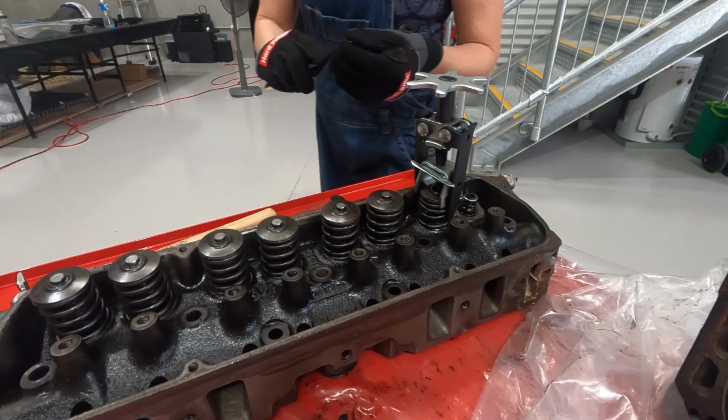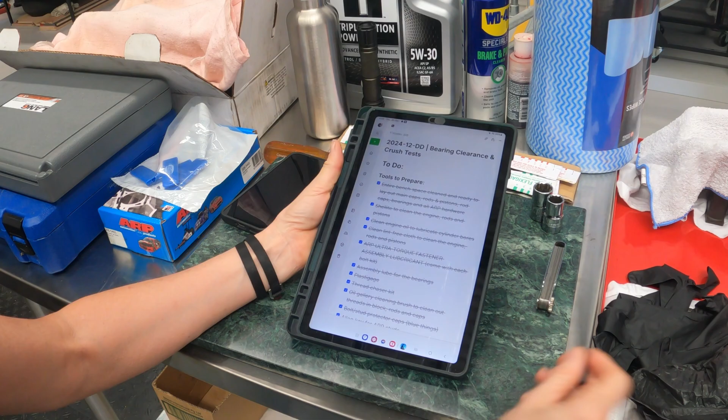So I've made a nerdy checklist, which is going to guide me through doing this because I haven't done it before. I've researched a few different books to get a sense of how it should work. So I'm pretty confident that I've got the procedure right, but because I've never done it before, I want to be quite methodical in how I go about it. So I have already gone through a list of all the tools and bits and pieces that I need, and that's all laid out here.

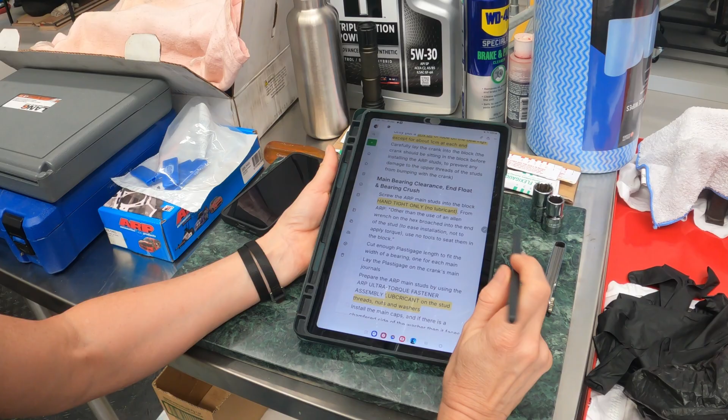Going to start with cleaning and getting the main bearings ready. I've got a few notes here highlighted which are important things for me to pay attention to. So once that's all cleaned, I'll get started with main bearing clearance, end float and bearing crush tests. I'm using Plastigage to do the oil clearance checks. Haven't decided yet if I'm going to do it on all of the main bearings or maybe just 2 or 3 of them. We'll see.

I'm also using ARP studs for the mains. So they have come with a particular lubricant which I'll need to use on the threads and the nuts and the washers for those. So that's why that's highlighted. And they have their own torque spec as well, so I'll be making sure to follow that. It's not too far off what the 308 factory torques should be, but I think they generally need to be a little bit higher with the ARP studs, so that's why they are 80 foot-pounds instead of the 60 to 70 foot-pounds that the Holden manual says.

Now, bearing crush is not something I could find much information about. Gary, who I've mentioned before as my Holden mentor, recommended that actually, and I think he found me a little bit of an instruction for how to figure out what the bearing crush should be. I don't know that it's all that essential, and what I have read is that if you get your oil clearances coming out pretty well to spec, you don't really need to worry about bearing crush, but because I'm here learning, I'm going to give it a whirl.

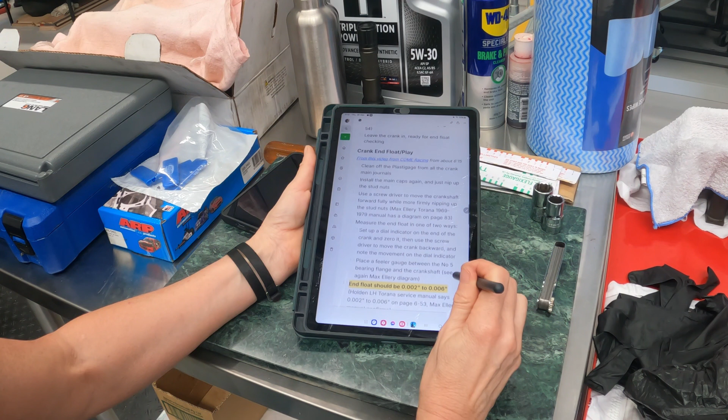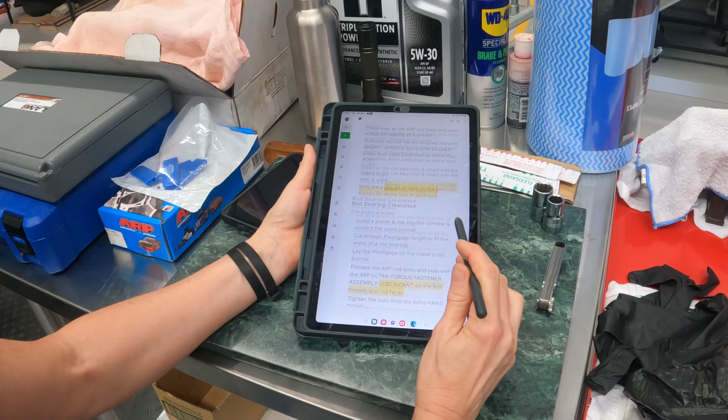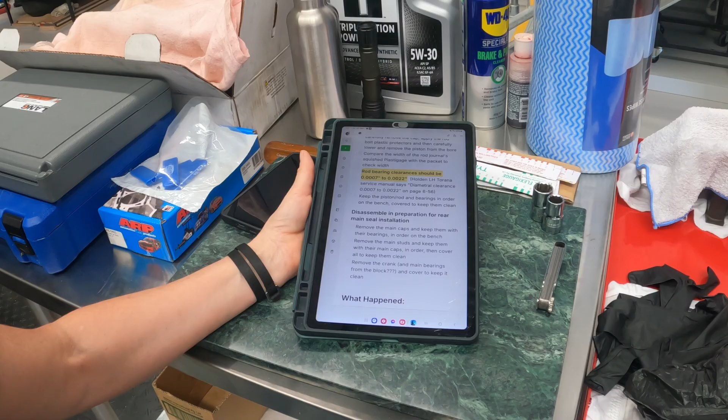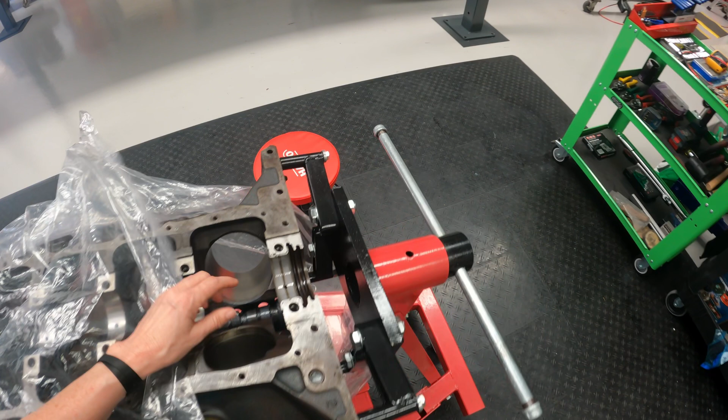And then if I reach that, I will pretty much be ready to turn my attention to possibly the scariest part of this build. Now, the scariest part of this build is the rear main seal, which I have chosen to use a rope rear main seal. Could be a mistake, I'm not sure, and I'm not sure if I needed to get any machining done in order to use a neoprene or some other kind of rear main seal. We'll see. I just wanted to be authentic, so yeah, that's a question and a problem for another day.

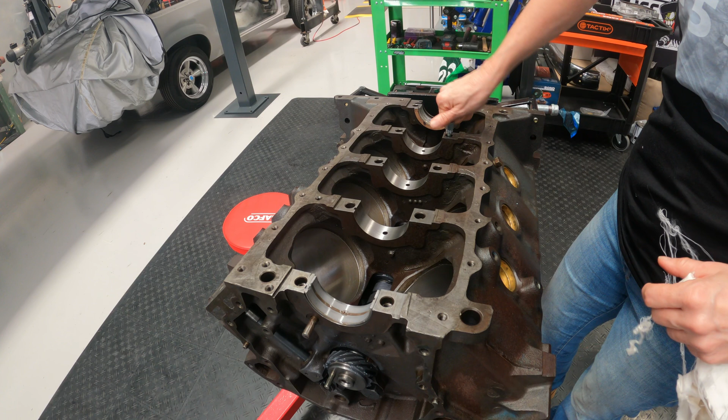The block has been cleaned, including all these threads, but I'm just giving them a quick clean out with a thread chaser because it's been a little while since I did clean the block. Just want to make sure there's no grunge in there. There is lubricant, but there's no crud, but yeah, it doesn't hurt to check them.

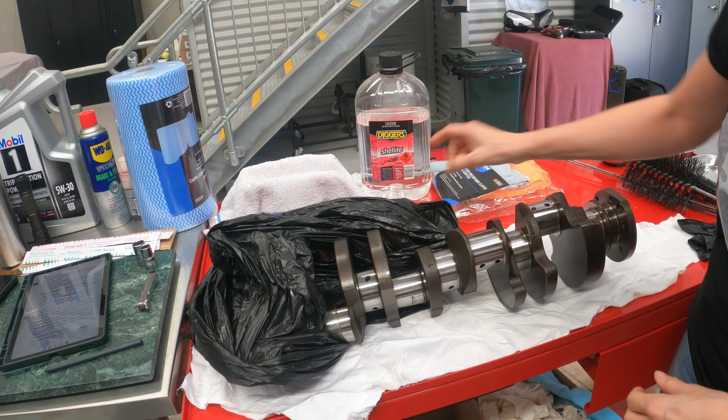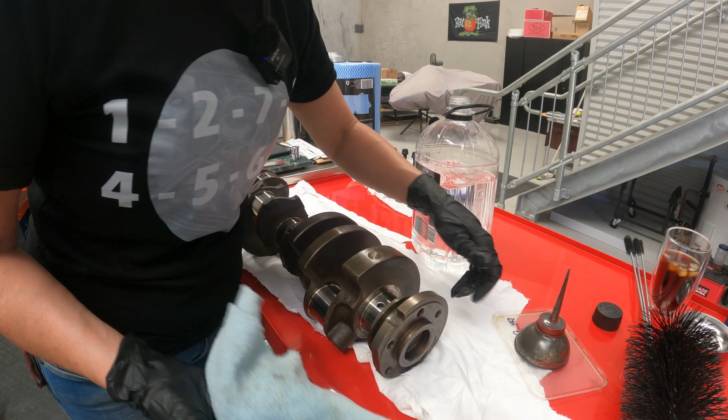So I will get started with cleaning. And I'll start with the crankshaft. This has already been cleaned actually quite thoroughly, even the oil galleries through the journals there. And today I'm really just giving the journals in particular a bit of a once-over, so there's no grunge or excess lubricant on there. We have ACL bearings.

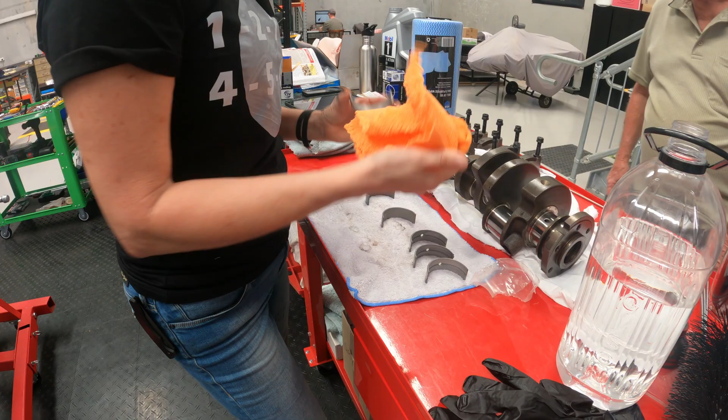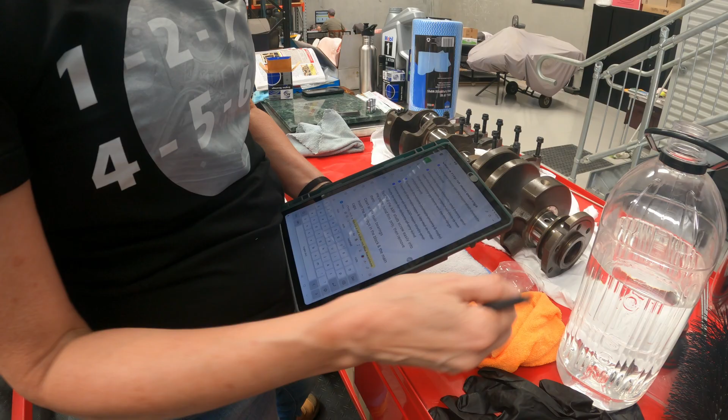So all the crank journals are clean. I have cleaned the main caps. I have checked over all the studs and nuts. They look good. Well, they're new, so they should be fine. I've already checked that they screw into the block okay. I've cleaned all the main bearings. So now I'm just going to put them into the block.

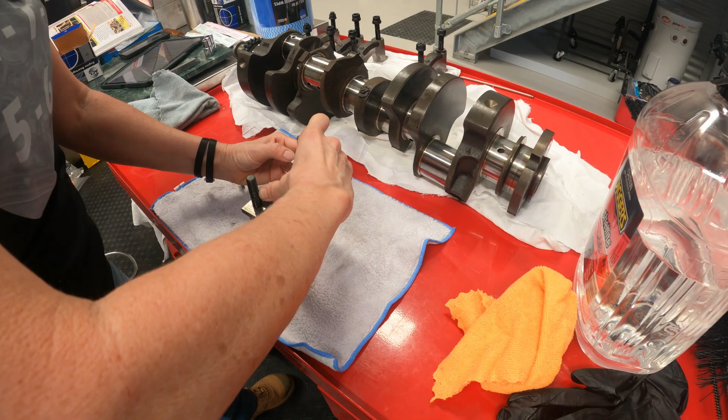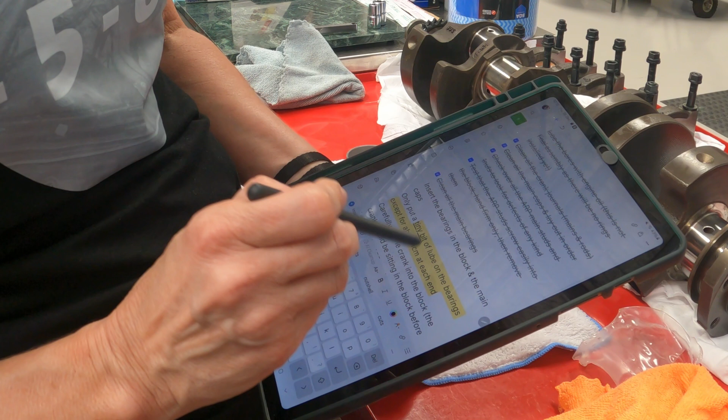For some reason I found an instruction to put a little bit of lube on the bearings, but that doesn't make any sense if I'm going to be putting Plastigage on there. So I think that is actually a wrong step. I'm not going to do that.

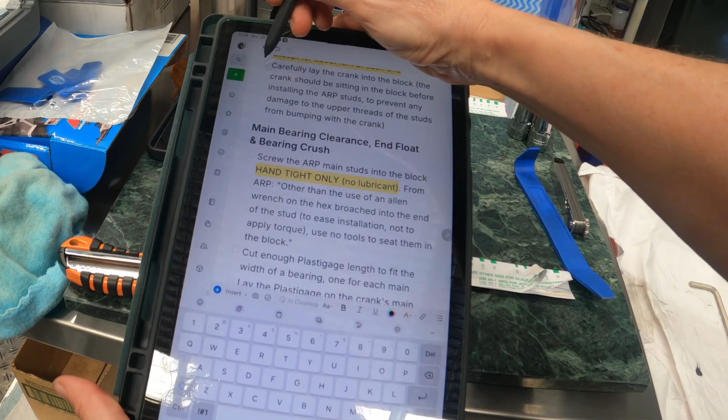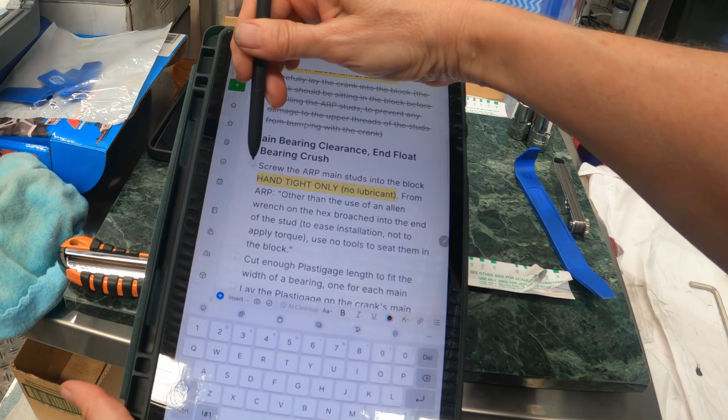And then the crank will go into the block next. So the crank is in the block. It did have to come out again because I dropped the first piece of Plastigage down onto the cam and had to get that out. The ARP main studs, they just get screwed into the block hand tight with no lubricant, so that was done, well, main cap by main cap. And the same with the Plastigage. I ended up putting that onto every main journal.

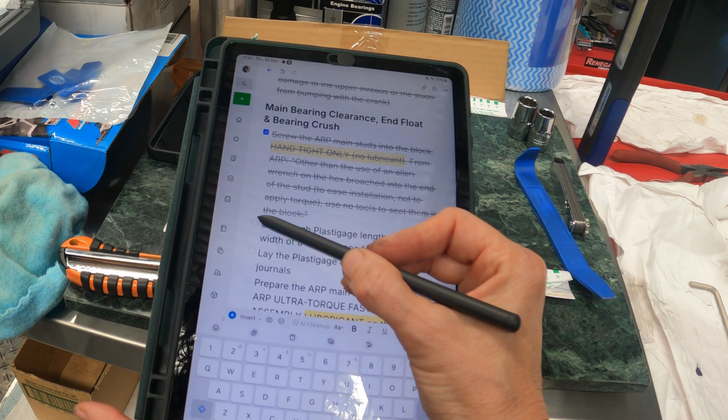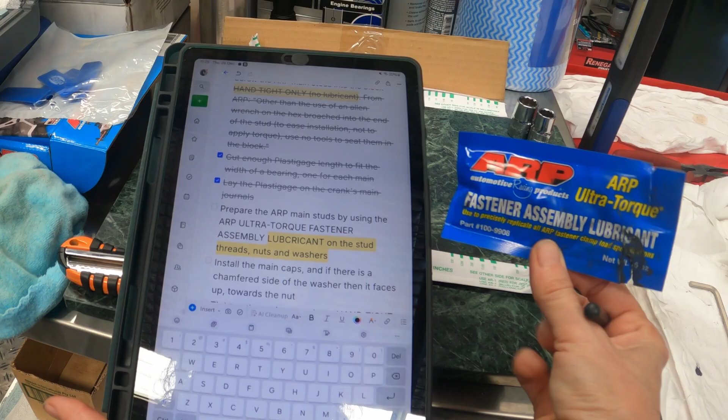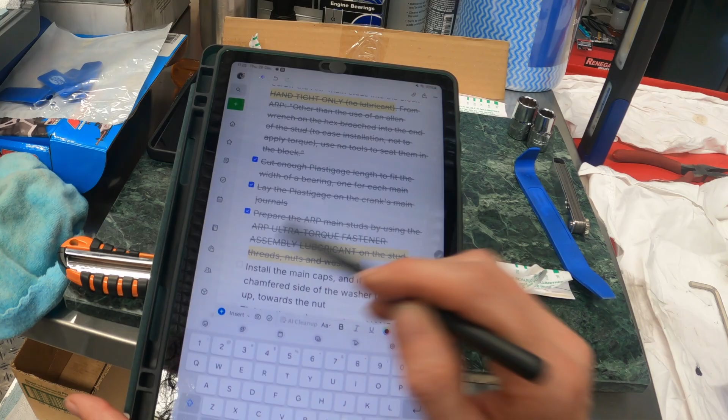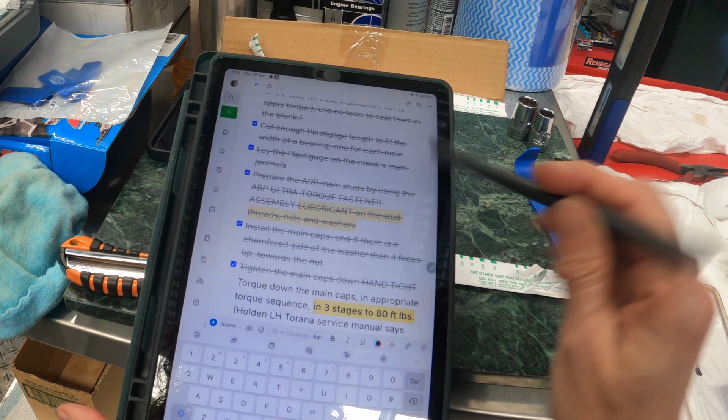And then I did use ARP's lubricant to do the stud thread, the upper threads on the studs, the nuts and the washers. So they are all done, and all the main caps are on, but I have not tightened them. Whoops. They're just hand tight at the moment, so we are now at the stage of torquing them down. This is just getting the main caps down onto the block before I get a torque wrench.

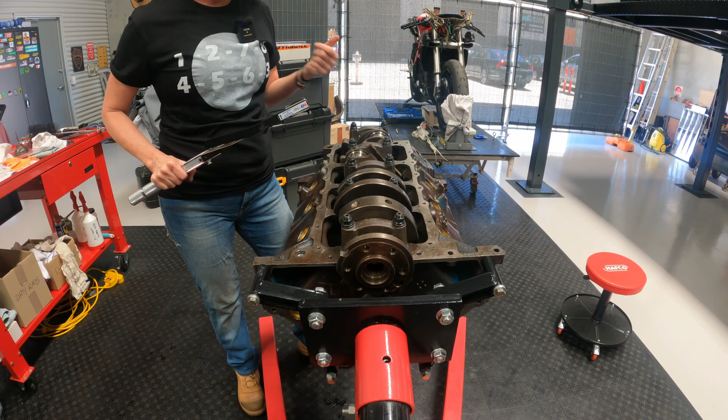So with these ARP studs, the torque is 80 foot-pounds. I've done 30 all the way around and 55 all the way around, and now I'm going to find out if I'm strong enough to do 80. Maybe not. Last one.

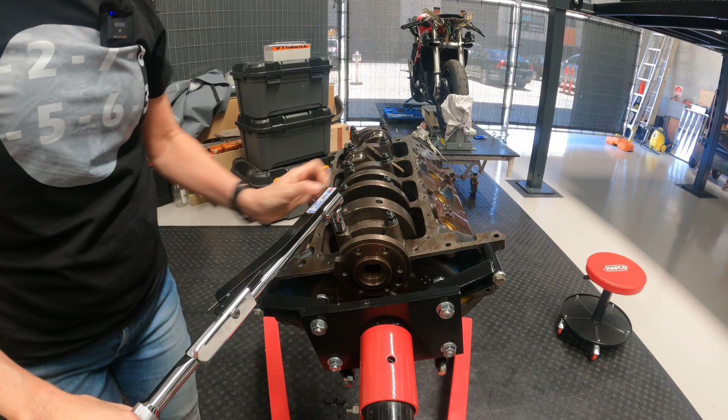Yay. The only interesting thing is that, and it's probably because they're studs and they just get hand tightened into the block, but there's slightly different lengths of stud hanging out. That's probably got 3 threads hanging out. That one's probably got 4 threads hanging out. And I don't know if that's consequential or not. It could just be the way the lubricant kind of grabs or gives as the nuts are getting torqued down. But yeah, 3 or 4 threads hanging out.

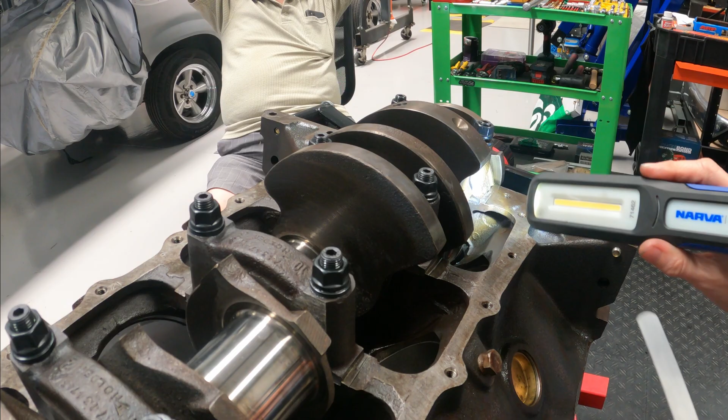So I was in two minds about doing the bearing crush, but decided to do it on one main anyway. So what I've done is left this torqued, completely backed this one off, and then I'm going to put a feeler gauge in between the main cap and the block. And ideally it should be between 3 and 5 thou. And this is a 3, I can't do it with one hand. What's this one? That's a 3.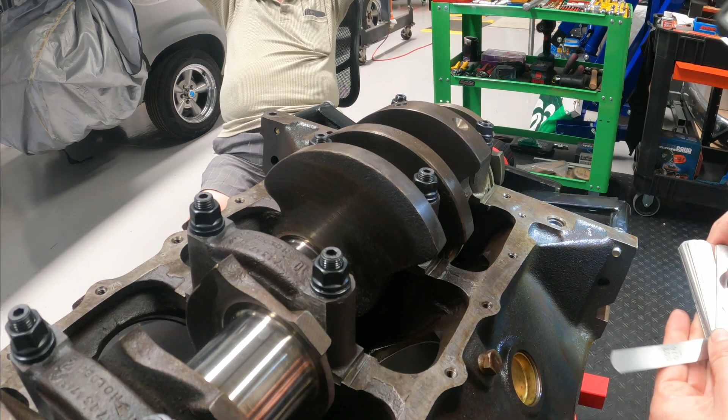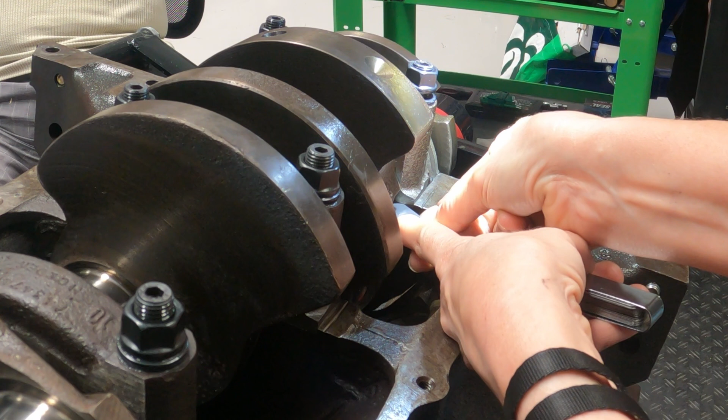Well, I had it in before, but I can't get it in now. Why would that be? There we go. Will it take a 4? No. It won't take a 4. So there we go. I don't know if that's worth doing or not, but that's what I did.

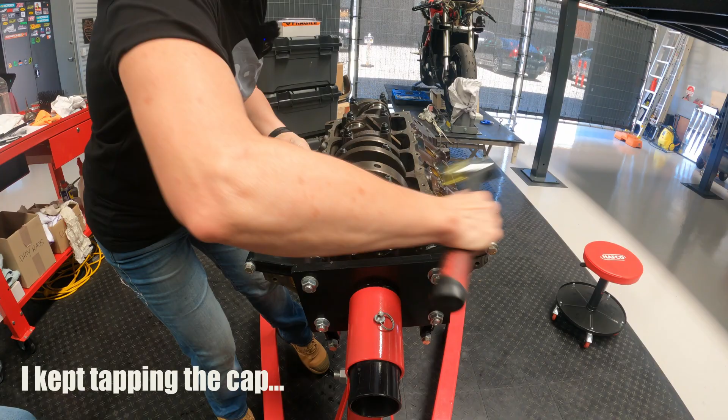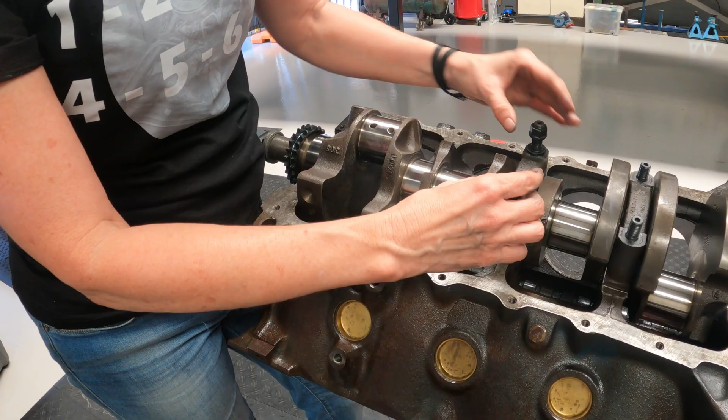So what seems to work is I've got to take the studs out and then tap the main caps loose until my little hands can lift them off with some level of control. There we go.

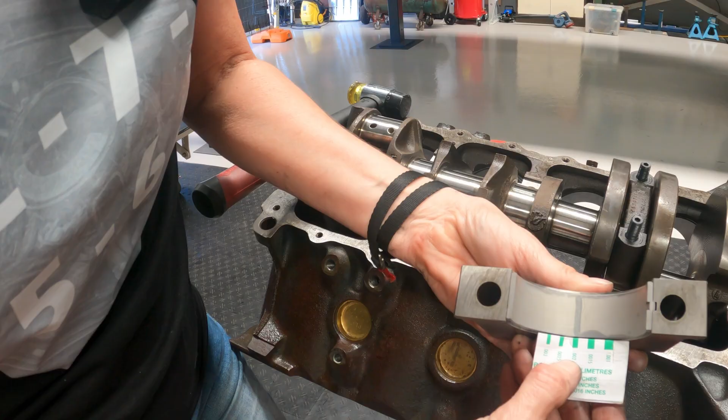And they're all pretty much coming out at pretty close to that 2 thou, maybe a tiny smidgen bigger, but not as much as the 1.5 thou, I think that one is. They're a bit smaller than that, and definitely not as narrow as the 2.5 thou. So anyway, they're all coming out within spec.

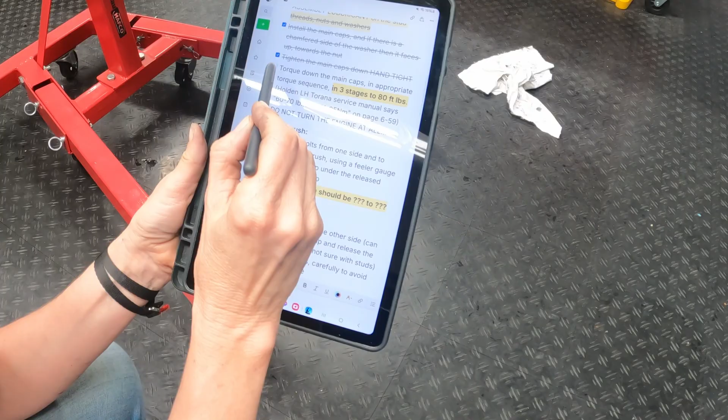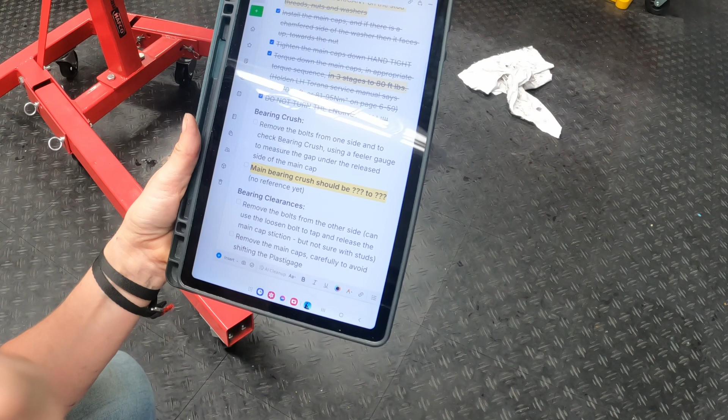Right, so just keeping up with my checklist. Torqued everything down, obviously. Did not turn the crank in the engine. Did the bearing crush check on the number 5 main cap at the rear because I didn't really want to completely release only one side of every main cap, so that was more just for the experience of doing it. As it turned out, I think it is within spec anyway, but I'll put numbers on the screen just to confirm everything.

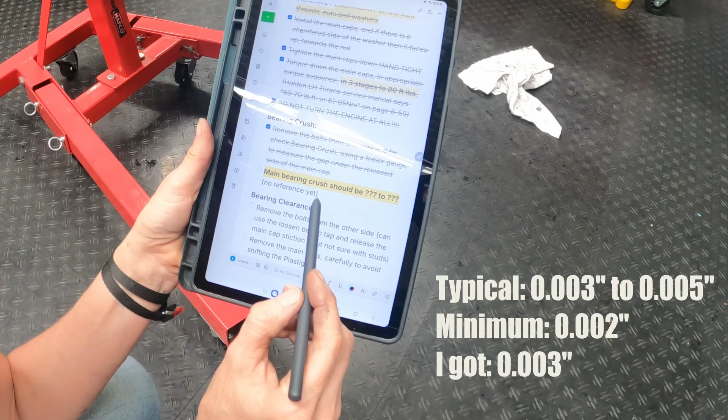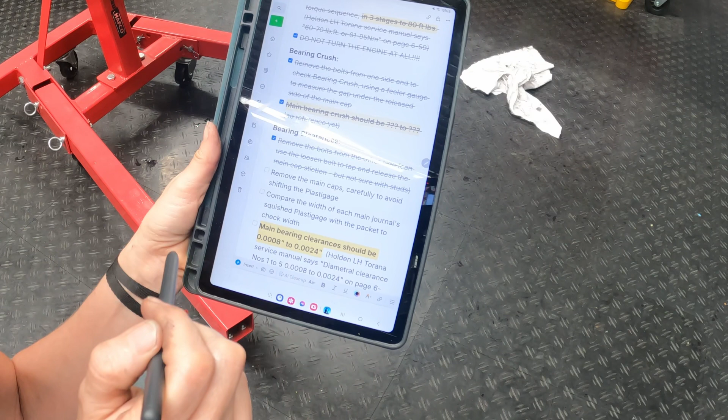So I didn't know what it was there, but I think we worked out before that it had to be between 3 and 5 thousandths of an inch, and I think it was 3 went in, but a 4 would not go in. So I'm pretty happy with that anyway. Bearing clearances, we've done that. I took the bolts out from the main caps, took the studs out as well because that just made it easier to tap the main caps free.

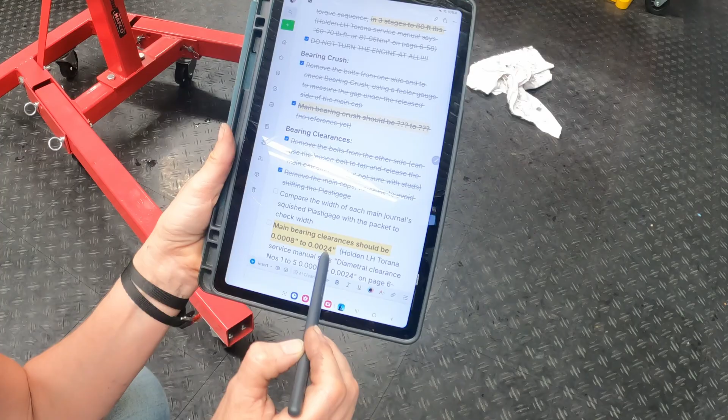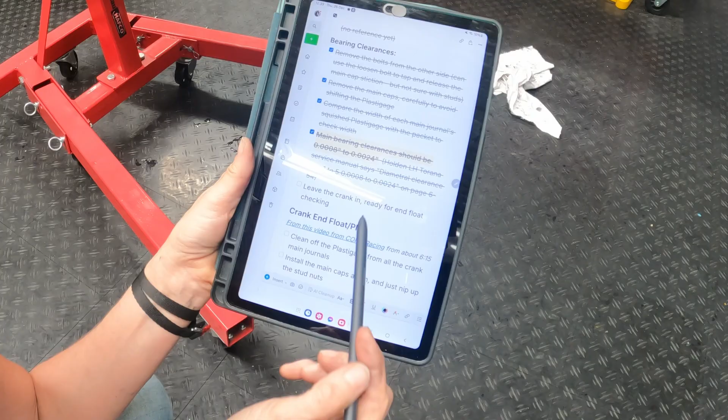And I did that with a combination of a rubber mallet and a brass drift and a hammer, just where I could get access depending on where the counterweights were on the crank. So, didn't destroy any of the Plastigage, which is good, and all of them came in at about 2 thou, which is within spec. It had to be between 0.0008 of an inch to the 2.4 thou. So that all checks out. I've cleaned the Plastigage off the crank and off the main cap bearings and getting ready for an end float check.

So the crank came out, put a little bit of this on the bearings, and then it's gone back in, and the studs, the nuts, have been nipped up a little bit, and then I just used a screwdriver to get between the block and the last counterweight on the crank and just shifted the crank as far forward as it would go, which was barely anything. And the reason I'm doing that is because it's time to check the end float.

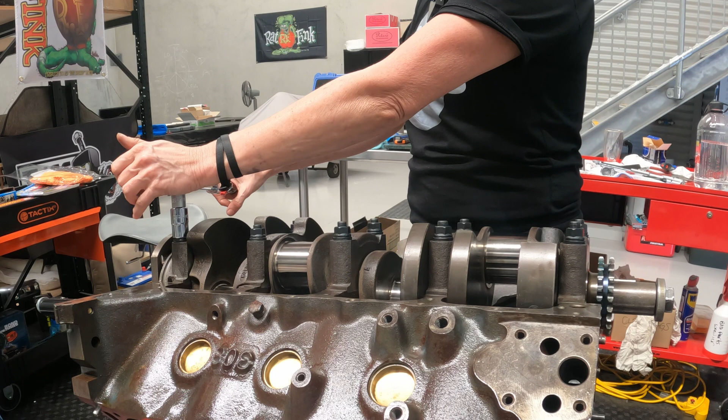So now that that crank's moved all the way forward, these get nipped up a bit. Scotty thinks it's a good idea to get them all at equal torque. Not torqued up to spec, but just to a nice equal but lowish torque. And then I'll use the dial indicator and check how much end float we have. This is only 10 foot-pounds, just so they're all even. Don't know if it matters or not, but it takes no effort, I guess, so doesn't hurt to do it.

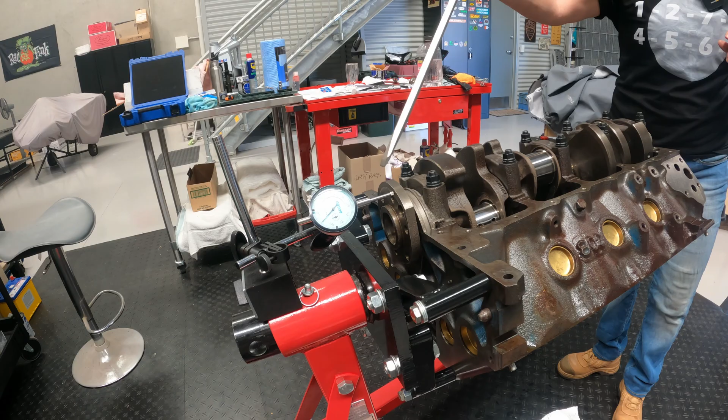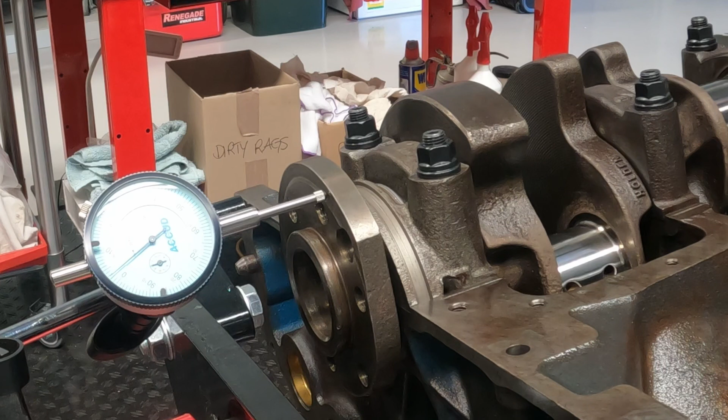Dial indicator set up against the back of the crank, and it's been zeroed. So now I'm going to move the crank back, and we should see that move. And that moved almost 2 thou, I guess, but not quite. Maybe I didn't lever it enough. Let's see what happens. Not getting enough purchase. No, that's it. So it's just shy of 2 thou, I would say.

So this is the nerve-wracking thing, is have I got the screwdriver in a nice safe place? I can push it out to nearly 4 thou, but it wants to sit there at 2. It's got to be somewhere between 2 and 6 thou. So that seems like it's in the ballpark anyway.

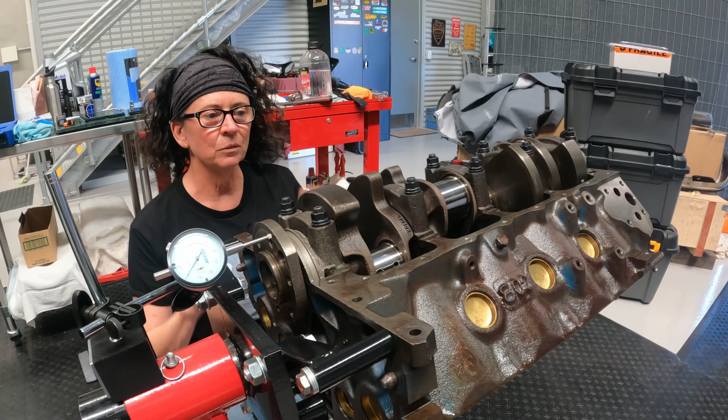So just to check the process, instead of using a screwdriver to shift the crank back and forth, we used a rubber mallet. Scotty had seen that happen in some other situations. Got the same 2 thou and loosened off these. They were at 10 foot-pounds. Loosened them off and then just did them finger tight. Did it again, still got 2 thou of float. And then also checked it, shifting the crank in the other direction.

So moving it, what did we do first? Did we move it forward and then moved it back? So whatever we did the first time, we did it the other way and still got 2 thou of float. So I think that's what we're living with, but it's okay. It's sort of within the range that we need. I'm happy enough with that.

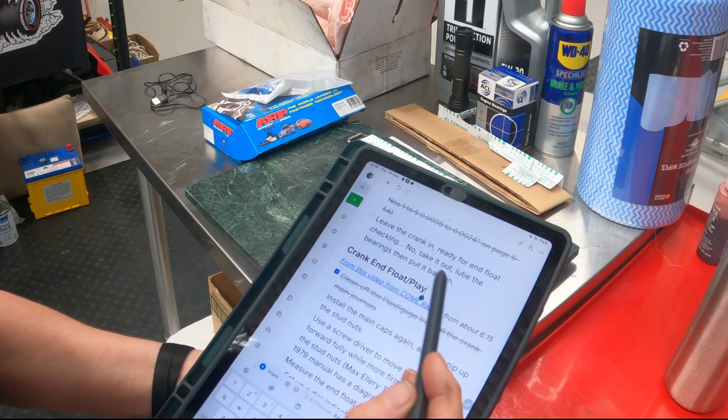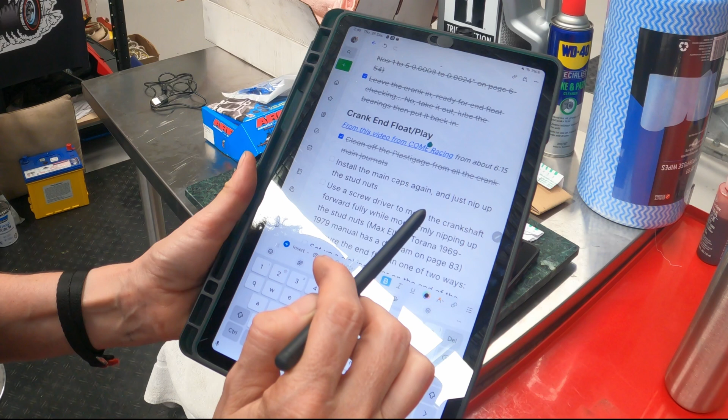Where we're up to today is I realised I was not going to leave the crank in after doing the bearing clearance check because I wanted some lube on there, given that it was going to be sliding back and forth against bearings. So that's fine. So I had cleaned off the Plastigage already from the crank journals and from the main cap bearings. So we reinstalled the main caps, nipped them up, but also took them to 10 foot-pounds just for consistency.

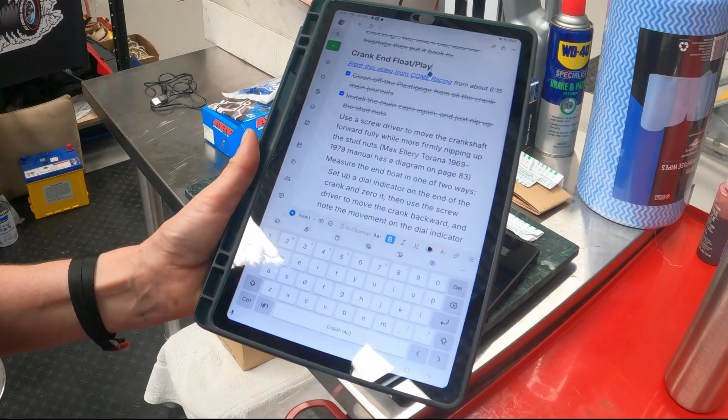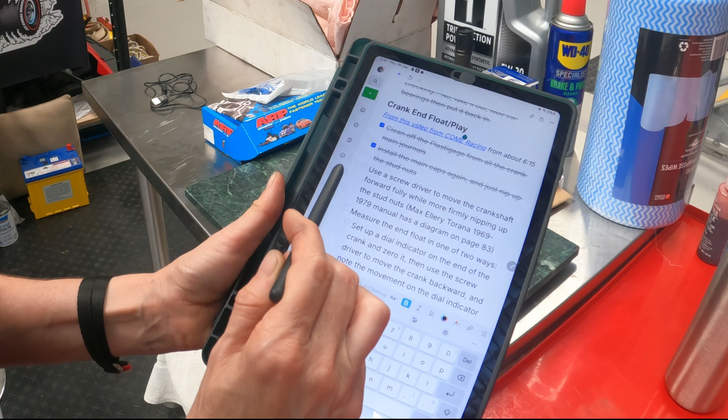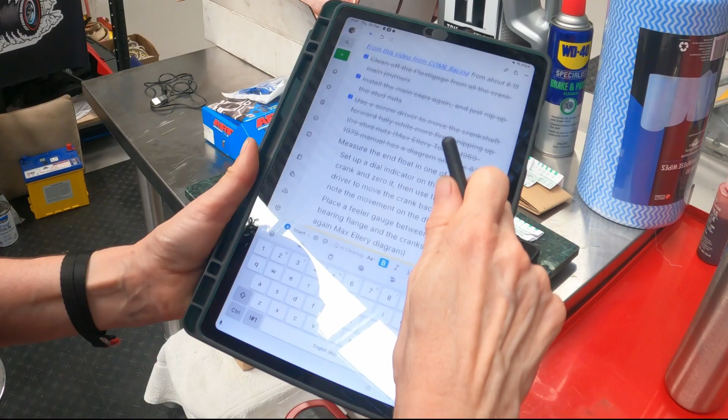And as you saw, that didn't seem to matter because even releasing them and just nipping them up by hand, we're still getting the same 2 thou, or it's slightly more than 2 thou maybe of end float. So I had used the screwdriver to move the crankshaft fully backwards and forwards as part of that end float check, very carefully, of course, against the crank's counterweights and the block, not the main caps. So that's now done. There were different ways, of course, to measure end float. You could use a feeler gauge, but we used the dial indicator method, so that was easy enough.

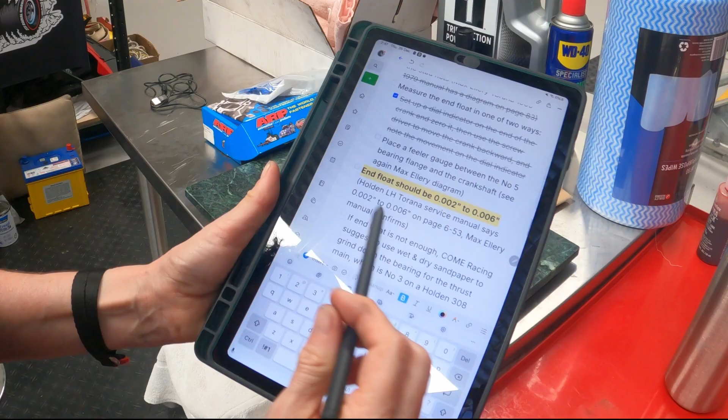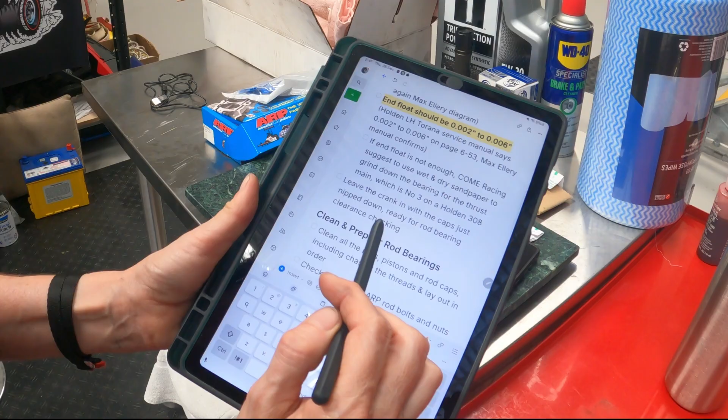And as you saw, checking the end float, we got a little bit more than 0.002 of an inch, but it needs to be between 2 and 6 thou, which seems fine. And that's enough, so I didn't have to do any modifications. So the crank has now been left in there with the caps just nipped down, and that is ready for the next step, which is rod bearing clearance checking. So that's where we come to next, back at the shed.

So it's been fun today because, well, Scotty's here as he usually is, but also because my dad hung out with us today, which was really cool. I hope he comes and hangs out more when I'm playing with the engine or the motorbike or whatever. Anyway, next step, rod bearing oil clearance checking.